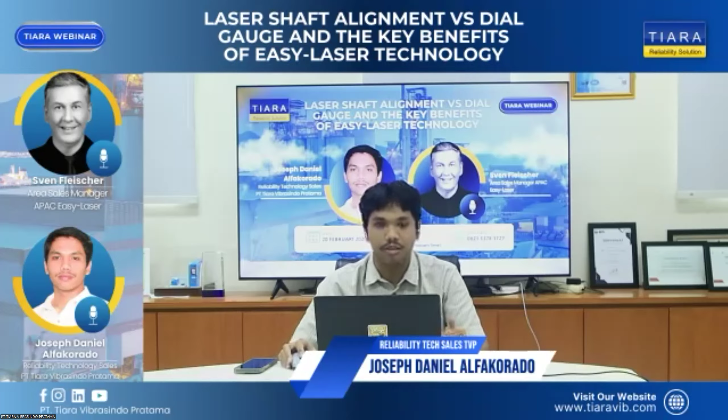Hello, good afternoon. Selamat siang. Halo Sven, selamat siang. Good afternoon.

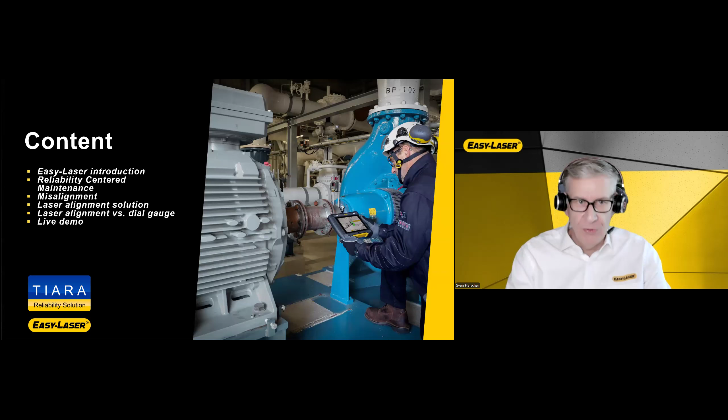Very quickly about the company, Easy Laser. In regards of facts, we were founded back in 1994, so a good 30 years ago. That's the time when electronics and digital capabilities were used to build laser alignment tools for industrial usage. Our company is based in a town called Mölndal, situated in a suburb of Gothenburg in Sweden, the second largest city of Sweden.

We have more than 100 employees at our headquarters. Those employees concentrate solely on designing, producing, and developing the laser alignment solutions, while our distributor network takes care of individual markets, territories, and countries. An appointed partner in cooperation with Easy Laser supports all of the operations and the end users in their territories.

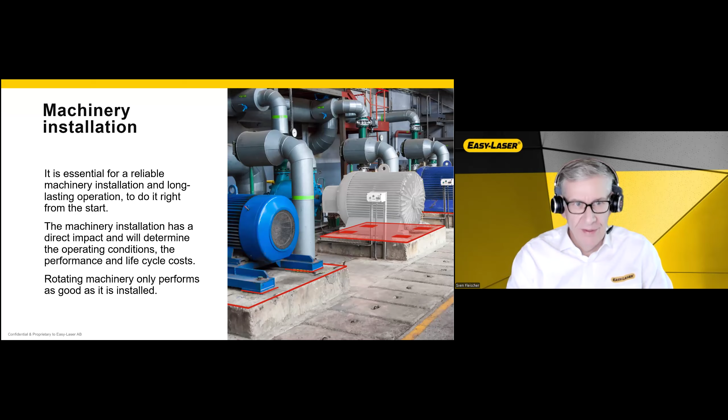So reliable, planned, and proactive maintenance and defect elimination typically leads to a much safer operation, more secure. It will be, as a consequence, more environmentally friendly. So I'll be talking here also about energy savings and things like this. Your operations will be, as a consequence, more productive, also therefore more competitive on the market and less stressing.

When we go back into asset management and maintenance philosophies, back in the 60s, the gentlemen Nolan and Heap figured out with statistics that most machines can be separated into certain patterns as they are operating in their lifetime. And against what the expectations of many people were at that time, and still today, those statistics have been proven correct even just a year ago. So that's not something very old that doesn't still happen.

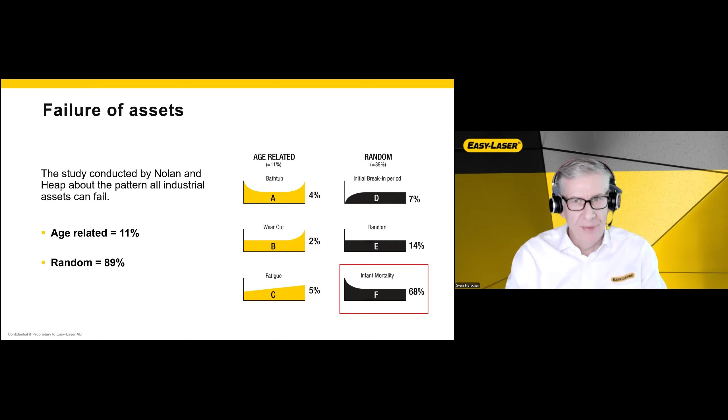That is something reliability-centered maintenance today is trying to overcome. And part of this material is to teach and make aware of our responsibilities. So when we have an idea and target of what we want to do, the application of the machines, the operation and so on, then we go to the designer, to the engineering, and to the installation teams to acquire machines for that job.

So there's a lot of communication and coordination possible. We are defining procedures of how these machines will be installed to benefit later from their operation in our processes. But most often we are lacking integrity - even though we know what needs to be done and how it's to be done, we often do not apply that. So we make mistakes, especially when dealing with different departments or even contractors.

So machines need to be transported after they are purchased. They need to be put on site. They need to be installed correctly with certain tolerances and specifications. And there, most of the failures actually happen.

This is what reliability-centered maintenance means. We like to avoid those problems. It's basically up to all of us to follow the procedures that have been defined, having knowledge about the effects of what we are actually doing in regards of those procedures. We need the right tools to comply with the requirements, to assess the condition of the machine, to make it comparable to those tolerances. So now in regards of laser alignment, why is this so important at the maintenance?

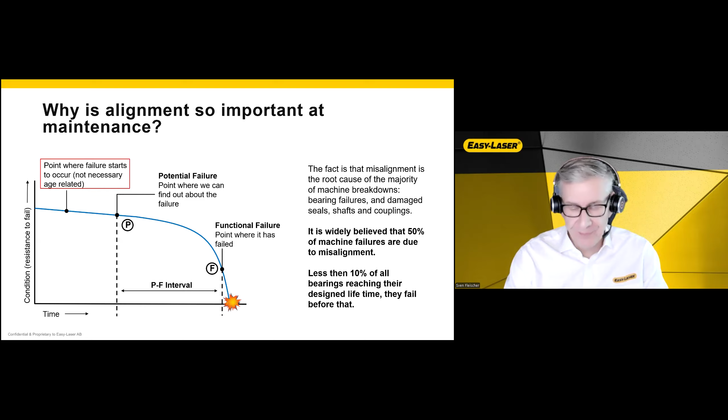Precision shaft alignment is key to achieving high reliability in rotating machines. If you just imagine that you would increase the load on a bearing by about 25%, then the lifetime of that bearing is already halved. Therefore, the lifetime is shortened, and you are coming permanently into the cycle of fixing and repairing the machine.

So my maintenance thinking is to make the machine healthy, so it will not come to that failure, or to reduce the possibility of that failure - and that means mostly bearings, couplings, and seals.

So an alignment of a machine, when we compare it to a tolerance like the ANSI standard at 3000 RPM, which is typically defined to have a permissible gap of 0.05 millimeter or less per coupling, per working diameter of 100 millimeter - if you achieve that, then you are simply increasing the lifetime of that bearing, of that machine, and having a cost saving as a consequence.

Now, when we talk about hundredths or even thousandths of a millimeter - because the coupling is typically smaller than 100 millimeter for the most common machines - we need to understand that you cannot really get close to that degree using a straight edge in the worst scenario, to measure the flanges on the coupling, or potentially also a dial indicator. Because a dial indicator may have a resolution up to hundredths, but typically achieves only 1/10 of a millimeter. And then you actually also do not really measure on the shaft, which is of interest for us in regards of alignment. So coupling alignment refers to the shafts because the bearings hold those shafts.

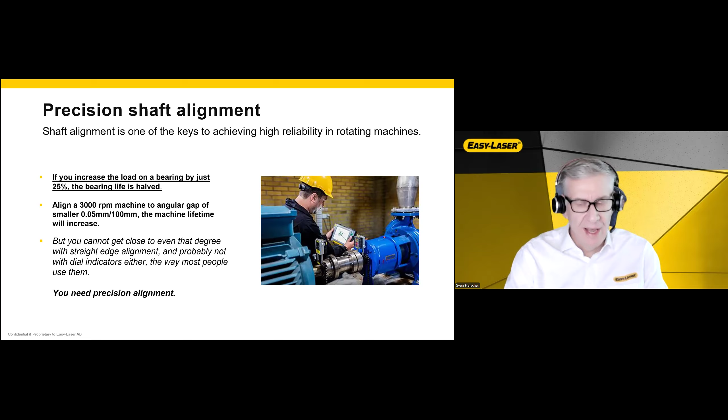What is actually misalignment? Where does it apply? We have not prepared this for very specific industries, since our audience is quite wide in different operations, but we talk in general about pumps, motors, gearboxes, compressors, fans, blowers, generators, or turbines. There are a lot of industrial machines transferring power - that is their core job. Transferring power means they are coupled with another machine, and therefore alignment for those kind of machines is really very important.

We concentrate a little bit more in this presentation on some examples for horizontal orientated machines. Besides that, you can do bore alignment, flatness, or parallel measurements on certain components in machine operations or vertically orientated machines. For today, because of the time, we give you an example in regards to horizontal orientated machines.

If you align those machines, typically you will increase the machine's uptime, reduce operating costs, and improve the processes - and depending what this process does, potentially the product quality. The environment, not only the machine itself but also the people around it, is typically safer. You have safer operations, less production losses, less bearing and sealing wear, and you are reducing, through elimination of root cause, the symptoms that typically show a problem - things like vibration level, high noise, temperature, and so on.

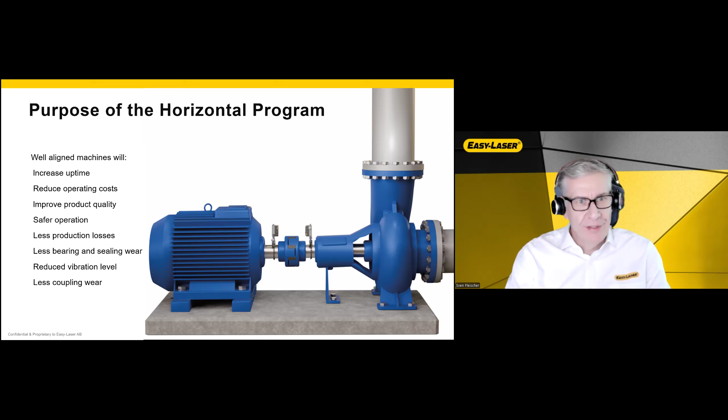The consequences of misalignment are basically the other way around. Machines that are misaligned have significant mechanical and operation problems, typically premature bearing, seal, and coupling failures. We're having increased vibration, noise, and temperature, which again is the symptom. But they are also consuming more energy, because if I'm having resistance in a misaligned component in my machine, I need more energy to overcome that, to rotate the shaft. Therefore the energy is higher, with excessive heat generation, which in cases can even be dangerous for the environment and the persons around the machine.

But the most important point in this whole story is the costly unplanned downtime. If a machine is failing because of bearing problems etc., you need to take it out of the process to fix, to repair, and bring it back into operation. This hurts the operations the most because you have loss of production, which costs a lot of money.

So to think about healthy operations and benefits of ROI - investment in precision alignment tools is typically paid back very quickly because they improve your operations and reduce the possibility and likelihood of a machine failure. Therefore you increase your machine uptime. Proper alignment minimizes those risks and extends the lifetime of your rotating machines.

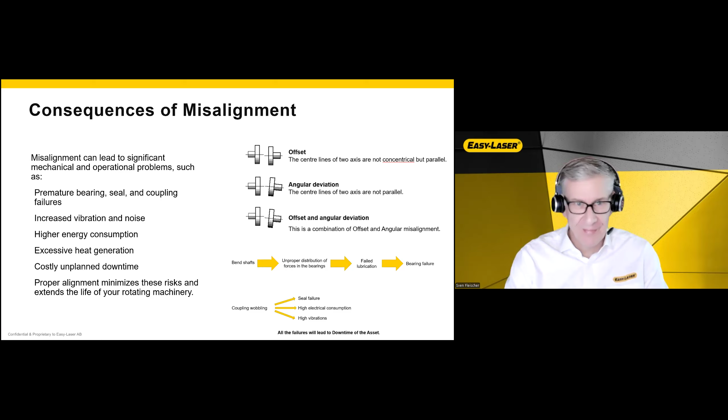Then there we had the dial gauges or dial indicator, and we have a bit of a topic on this towards the end of the presentation. Traditional methods require time and extensive knowledge to align the machine correctly and meet the required tolerances. When I see customers in the industry, in a large audience, and I ask who is doing the dial gauge, it's typically the senior engineers.

Those with experience have mastered alignment over a long time. Not everyone can necessarily align machines with dial gauges because it's complicated. You need to learn that, and it requires a certain amount of experience to master.

But even the best dial gauge alignment tools and engineers do not achieve the level that laser alignment today can reach. Laser shaft alignment is today's quickest, most accurate form of aligning machines using modern technology for precision shaft alignment. In addition to coupled shaft alignment comparisons, it can also be used for measuring more complex alignments.

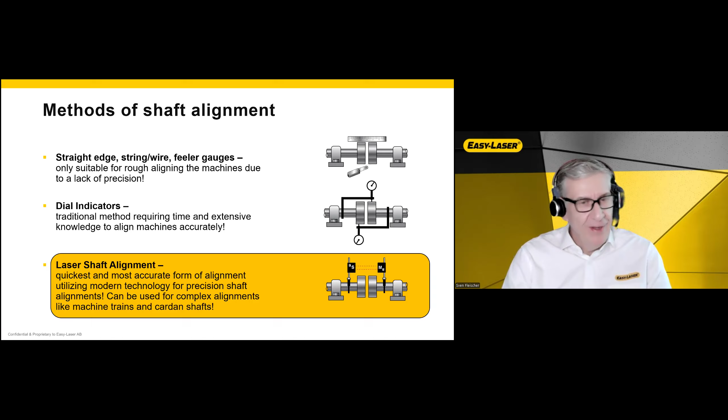To give you an idea what laser alignment actually is, many of you surely know how a system looks like, but maybe some others do not. We have here an example of what, in a carry case, an ordinary shaft alignment system looks like.

The heart of the instrument, or of the package, is typically the measurement units. There are two, an S and an M unit. They are mounted, as part of the package, with certain brackets, chains, magnet adapters, etc., around the rotating shaft from coupled machines.

There are additional accessories inside of this case, and the way you communicate and navigate through the alignment process is via a display unit. The display unit is a tablet, industrial grade, with multiple options and specifications.

We at Easy Laser do that app-based, so it's an Android operating tablet or industrial tablet, but you're not mandatory to use that. Andy will show you later that it's very easily possible to use a smartphone or any kind of tablet, as long as it's either iOS or Android-based, because you can just download the app yourself from the App Store.

As I said, there's no registration, no licensing, no money involved, and then you're ready to go ahead. You just need to have the measurement heads or a system for a certain purpose of aligning machines.

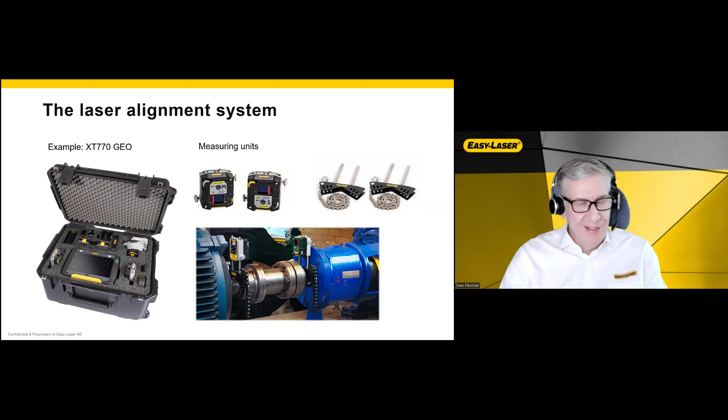But depending on your environment, and also how much you want to spend, you can run it on a tablet or a smartphone, which can also be industrial grade. So you have the complete option to choose between those hardware platforms—just download the app on that instrument and communicate via Bluetooth with the wireless measurement units.

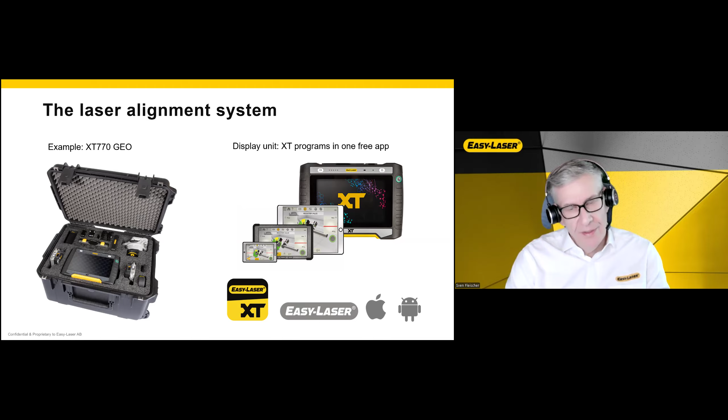So this is about shaft alignment and potentially geometrics, but the app itself serves even more. There are components available that help you align sheaves, for belt alignment. They communicate with the same app in the same way, via Bluetooth, completely free in the application. We also have a small vibration measurement tool that is purpose-designed and supplied into the industry.

I would call it a nurse. So it's not the specific doctor level with a super vibration data analyzer. It is something an engineer and technician that may not have deep training in condition monitoring and vibration can use. It's a checker.

You check and get very simplified information on that instrument about the rotating machine's vibration noise level, applying to the bearing and velocity, where typically unbalance, misalignment, looseness, and resonances apply, giving you an indication that this machine has a problem. It also gives you an FFT to pinpoint the direction a little, and that's why I'm calling it a nurse—it's very easy to handle.

You can use it over hundreds and thousands of machines, and for those machines where it's a bit tricky to figure out the root cause, you engage an expert, potentially a contractor, somebody that has another tool and the knowledge to do deeper troubleshooting analysis.

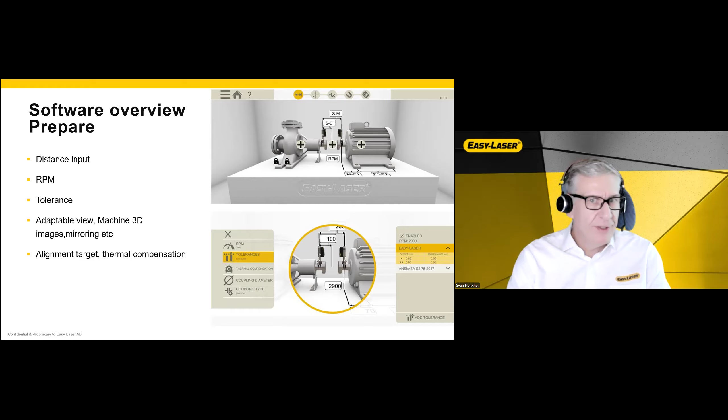When I say measure, I recommend doing the soft foot alignment or measurement before starting coupled or laser machine alignment. You have the measurement units on the machine anyway. And while many people prefer to measure soft foot with a dial or a feeler gauge on the foot, we like to measure where it matters, because the soft foot affects the operation of the machine.

That means the rotational energy of the shaft—we're interested in making the machine healthy, and that refers to the rotating shaft in its support, in its bearing. That's why we measure with the measurement heads on the shaft. So when we get to this soft foot menu, it goes a little further in the program, and you're requested to loosen the tightening bolts.

So when there is a soft foot existing, it shows you a relaxation. The machine is really moving because you tension and bend potentially the machine feet, and this is measured on the shaft. So if there's a soft foot or a movement greater than 0.05 millimeter on any of those feet, this is typically recommended to be corrected, because that stress towards the machine and its bearing is too high.

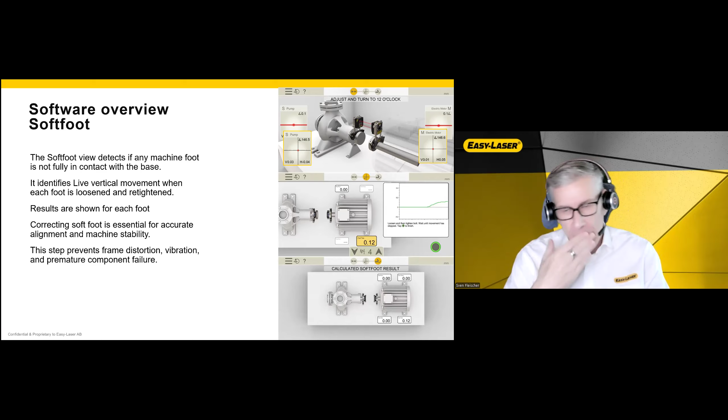After the soft foot is corrected, you can go into the measurement mode for the laser shaft alignment. Depending on the instrument chosen to be your shaft alignment system, you have various options to take data. The installation of the measurement units with those brackets does not differ.

You have the classic 9-12-3 measurement method, which refers to the dial gauge positioning, to ease those people that have done dial gauge alignment into doing the same with laser alignment. We recommend doing that with EasyTurn, because it also has 3 measurement points, but they are more flexible. You do not necessarily have to measure them at a 90-degree angle to each other.

The smallest permissible angle in positioning of the shaft between those 3 points, or each point, can be 20, so in summary 40. That means the smallest rotation angle at which we can measure and identify the alignment condition is 40 degrees. Mathematically it's better if the angle is greater, but typically you can rotate a minimum of about 90 degrees in summary.

With multi-point, you can take more data. It's dependent on the application, the machine, line of sight, and things like that. So that's basically your choice - you have multiple options that suit multiple kinds of applications and machines.

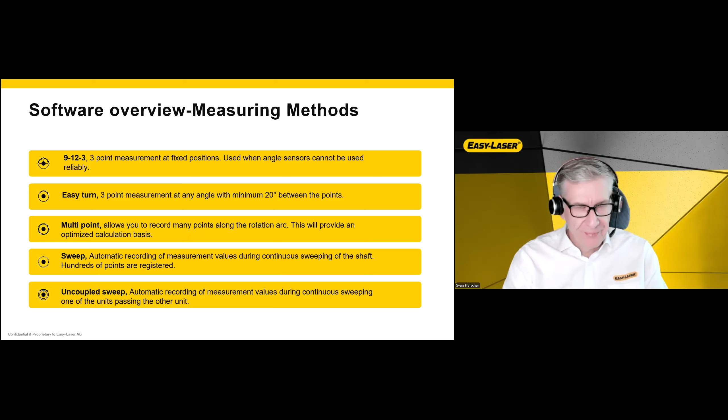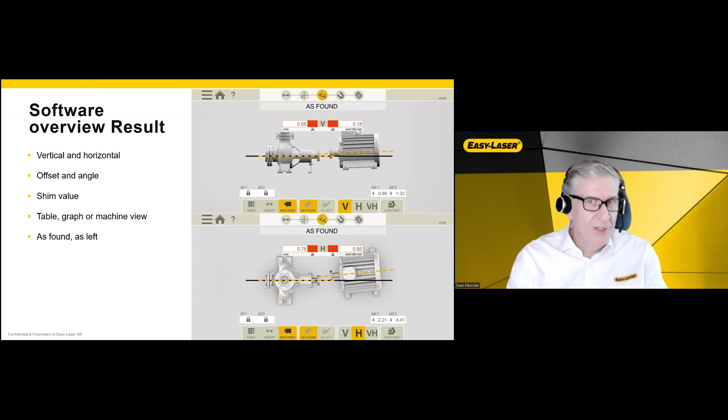In the next step, you would go further and do the live adjustment. While the measurement units are still on the machine, you can measure completely live and correct the position of the machine. There are different measurement or correction modes available. We have a small demonstration of this as well from my colleague Andy.

You bring the machine into range, inside the tolerance shown at the bottom of the picture, so those colors and values fit within the range of tolerance into the green and yellow range. Then you're good - your machine is basically tightened again and complies with the requirements. You're typically doing one more measurement turn to have a record of as-found and as-left, as evidence that you have corrected the machine and brought it into a condition that complies with the specification.

And then you are proceeding to the reporting. The software included with the app allows you to have the reporting immediately available through our templates, with all of the data from whatever you have done in the shaft alignment - as found, as left, soft foot, dimensions - all of those things are protocols, which is basically the chain of evidence we provide through the process.

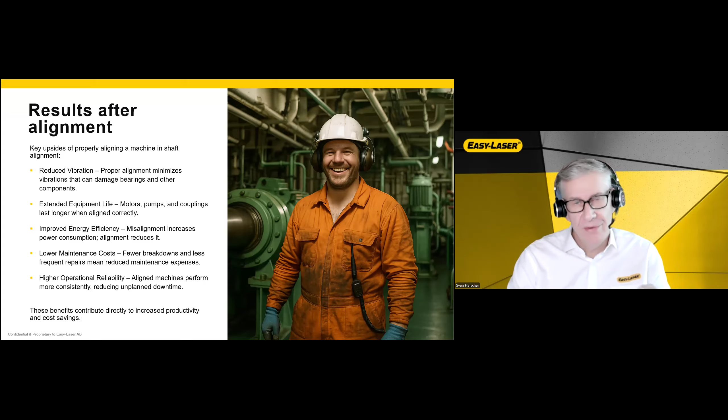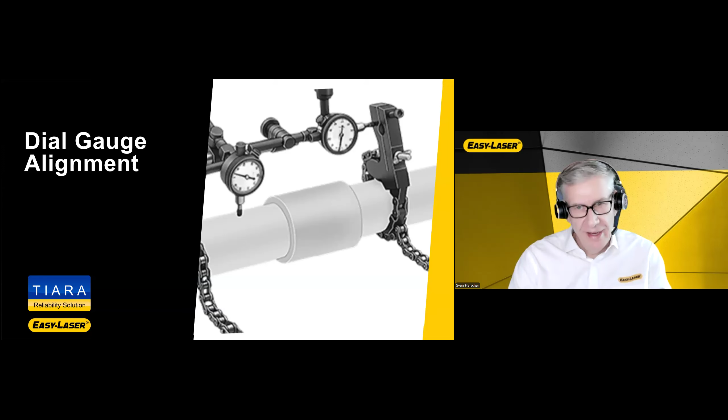Next, I have a couple of slides regarding dial gauge alignment. I don't want to spend too much time on them because it's quite complicated, especially showing the true picture. But if you look at these kinds of graphics, you'll realize how complicated it can be. Dial gauge alignment has many different ways of assembling those dials with certain brackets on the machine across the coupling.

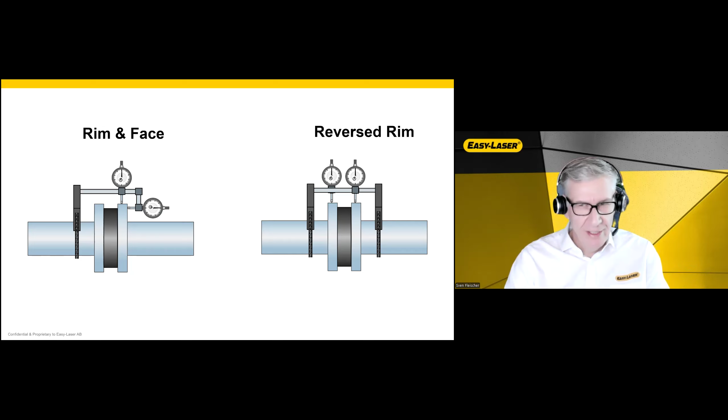The most famous methods used in the past are the so-called rim and face, and reverse rim methods. There are ways to measure with dial gauges pointing the plunger on the surface of the coupling, even though they're mounted with the bracket on the shaft - what you're really measuring is the surface of the coupling, and this may not be the rotational center line. With laser, we actually measure, with the laser bracket mounted on the shaft, the real center of the rotating shaft, which does not have to be true for the coupling. So that's already a point where dial gauge alignment differs a bit because of this technicality, which does not allow you to achieve the desired tolerances or accuracy.

When we're looking into the variety of brackets, brands, and dials that exist, there are hundreds and thousands, all kinds of designs. It's quite hard to learn how they should be assembled, in which way, and in what kind of assembly towards each other. It's not easy to put those dials correctly on, pre-tensioned with the bracket bar and things like that.

If you look at the animation on the drawings here, considering rim readings and face readings, these are typically measured at 4 positions, 180 degrees against each other, so 12 to 6 and 3 to 9 o'clock.

We are accessing, basically - excuse me, maybe I should drink something, just give me a second.

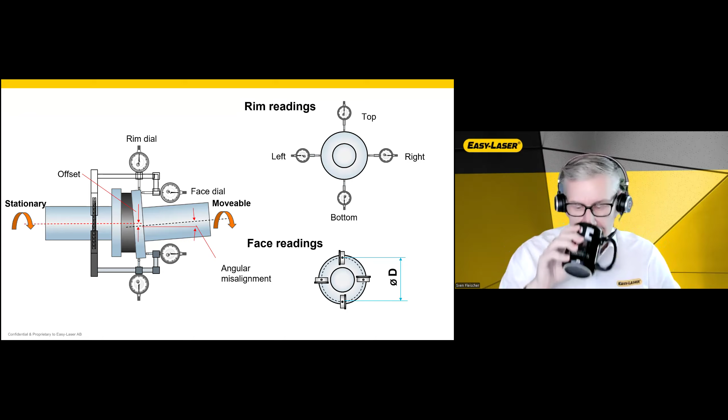We're accessing the displacement when we rotate the shaft, which affects the plunger of the dial, showing how much stress is inside the machine. We measure on the coupling, and from that we figure out a parallel misalignment and an angular misalignment.

You really need to be trained on that and learn how to do it correctly, and it comes with experience, long-lasting experience. Engineers today - there aren't that many who can actually correctly measure with dial gauges. I have done that, I can do that, but I will never be as good or as fast as I am with laser alignment, which is by far easier to handle.

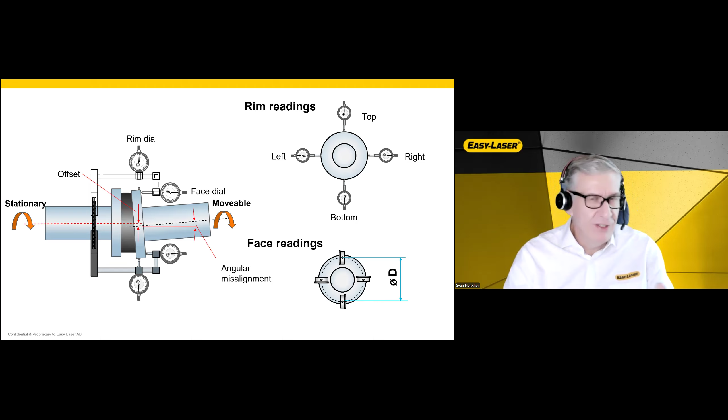So rim and face have different mounting alternatives - there are really many options, depending on the situation of the shaft, with coupling, uncoupled, etc. By right, you would need to learn and know all of them, and depending on the arrangement of the dials, the kind of readings need to be really understood to then do your calculation of the alignment by hand, because the dials do not tell you about the alignment of the machine itself.

You have to take those readings in the correct way and do the calculations by hand. You basically have a measurement program in Excel that allows you to convert the data and does the calculation, but it is not done by the dial gauge itself. Here a lot of mistakes happen, misunderstandings depending on the arrangement - it's really a tricky thing.

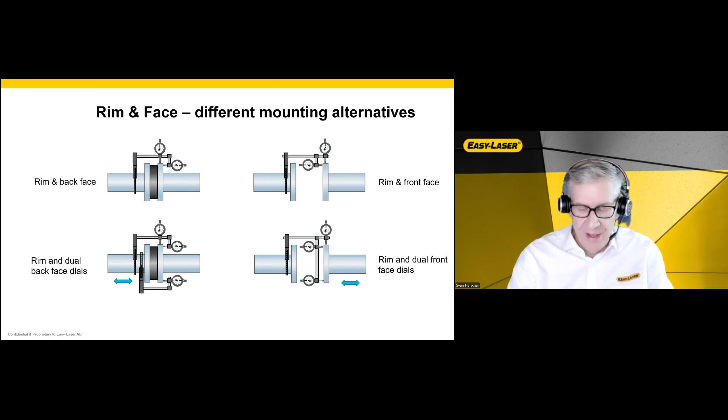Another thing is the so-called validation rule - the classic top plus bottom versus left and right, where those two pairs, 180 degrees shifted from each other, need to be compared. Mistakes also happen here, where the data gets mixed up and then wrongly calculated. That's really something to be aware of.

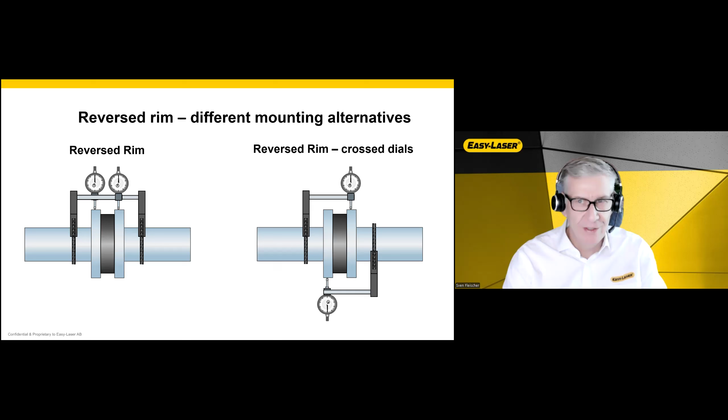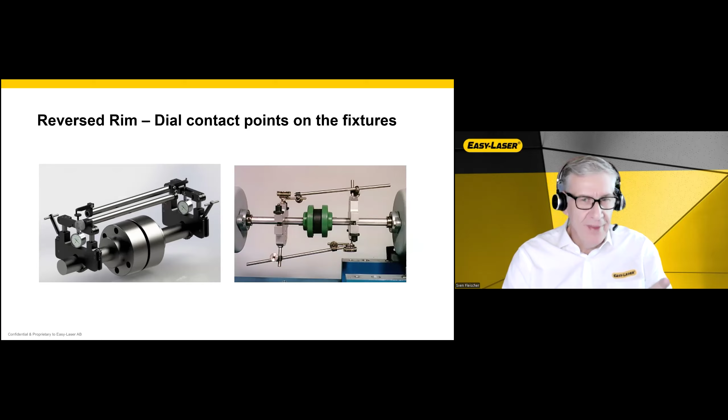Just one more example here about those fixtures in the reversed rim - the contact points of those fixtures need to be really understood, so that the brackets that are mounted, depending on the equipment used, are assembled in the correct way. The challenge, summarized a bit, is that dial gauge indicators have mechanical limitations inside the bracket and the dial itself.

Then they are very, very dependent on the operator. We have made tests with customers, also on our own - same machine, same dial, same bracket. If you take two engineers to repeat the measurements, you typically get two different results, because everybody installs them in a slightly different way. There you have a lot of variation in interpreting the data.

Then calculation is important, and you're still not yet at the adjustment. All of these findings and calculations need to be applied to the machine in regards to adjusting it. One major disadvantage of this whole system is the documentation - today you are required to prove and document these kinds of corrections to the machine, and this is hard to do with a dial gauge. You're relying on a hand protocol that you maybe write yourself in Word or Excel.

But it is not really representing the measurement tools itself. The engineer is doing that, while the electronics, the digitizing from a laser alignment system allows you to have this report immediately, and it is basically therefore user independent. So it's really a digital way to secure the complete process of the machine correction and alignment.

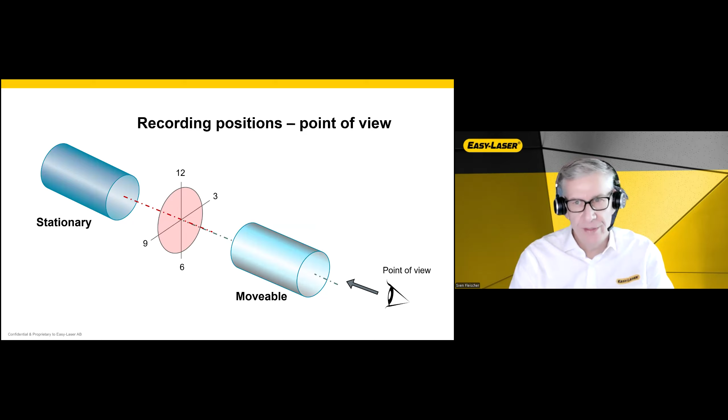The flow of the energy from the stationary machine towards the movable machine, or the other way around, defines how you look at the machine. We see this little indication on the bottom right-hand side, the point of view, because this defines where is 9 and 3 o'clock. Everybody knows where 12 o'clock and 6 o'clock are, but 9 and 3 is often mixed up because mechanics versus electricians look at the machine the different way. This is a classic mistake, that 9 and 3 gets mixed up, so consequently those rim readings in regards of positioning will be reversed.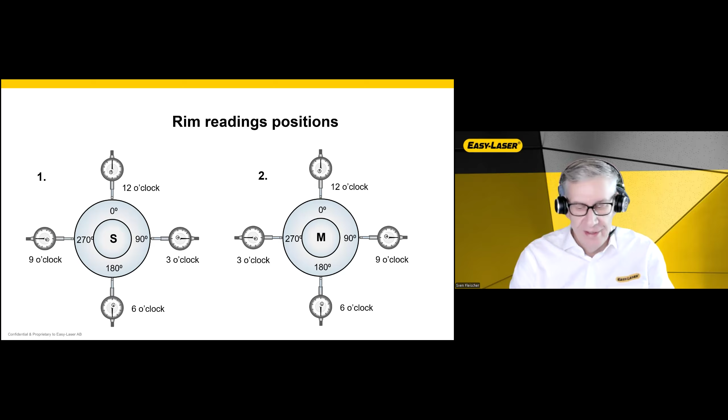So plus becomes minus, minus becomes plus, and that is very important to understand and to learn. The same applies for the face reading, that the 9 and 3 o'clock depend on the orientation of the machine, and need to be done correctly, or you need to know the correct way to do that.

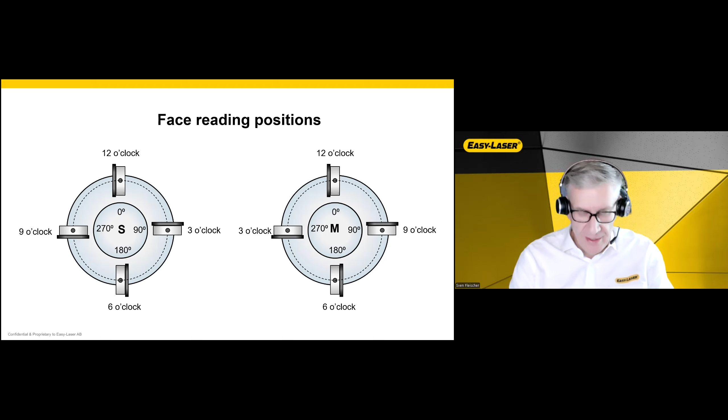Another example I had a couple of times, most often with users in Japan and South Korea, where this kind of dial gauge alignment usage is still common, and they always challenge laser alignment. They say, I'm the master in dial gauge alignment, and I do not trust so much the better technology. Often we find differences. By testing a machine once with the dial gauge and second with the laser alignment system, we're not only getting better accuracy results, the results will also be different. It was revealing with one customer in Japan who had doubt that the laser alignment measurement was not correct. We proved him wrong, because this person did not understand the influence of bar sag.

This is the pre-tightening of the dials against gravitation. Measuring between the position from 12 o'clock versus 6 o'clock had a major, huge impact on this person's measurement. Even though he had measured with dial gauges for many years, he had not correctly compensated for the bar sag. This applies to the knowledge of how to install the dials correctly, and how to determine the compensation for bar sag, how to do that. There is really a long guideline and training material for this.

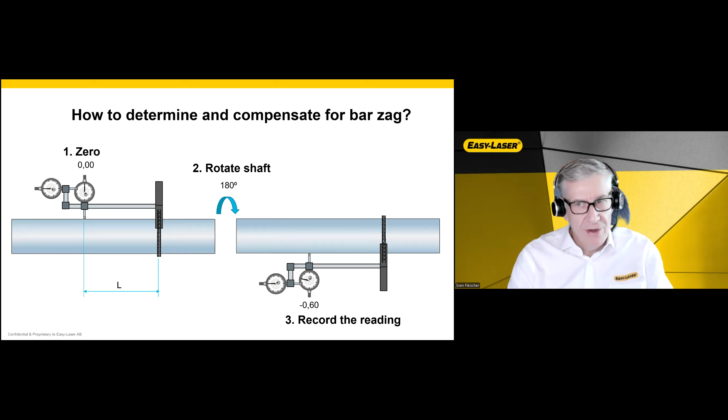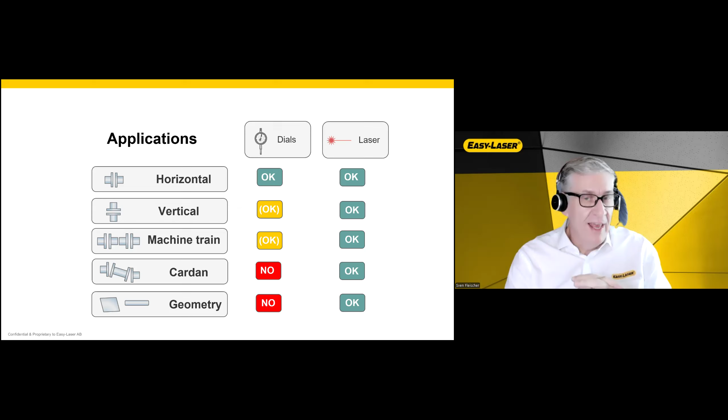Bottom line from all of this: dial gauge alignment is complicated, and we're talking here about standard shaft, standard coupling only. It needs to be learned, it needs many years of experience to master. And even if you have mastered that, you can achieve horizontal dial gauge alignment on a coupled shaft, but maybe not in the range where the specification or tolerance requires, not good enough. If you come across a vertical machine, it becomes even more challenging. A machine train already, multiple coupled machines, is really, really difficult to manage, calculate, and get right.

For cardan shaft couplings or machines, and for geometric aspects like line bore, flatness, and things like that, there's no way to do that properly with a dial gauge. This is all very easily taken care of by a laser alignment system. So these are the benefits of laser alignment versus dial gauge: it is way faster, much easier to handle, and way more accurate.

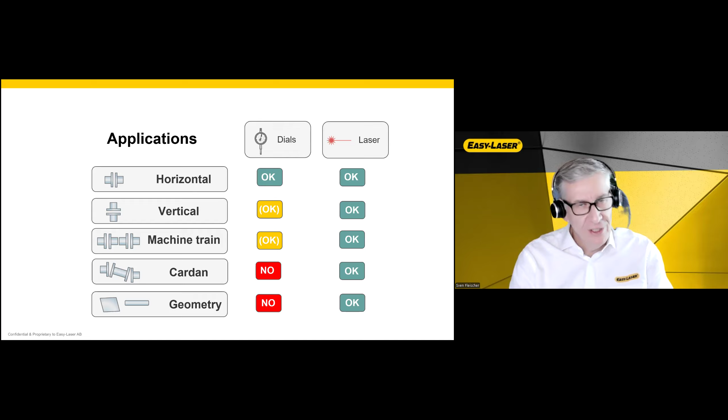It does not depend on the end user. That's the electronic core. It serves the technician as a tool to assess the condition of the machine, and it is completely digital. This 1 micron accuracy in assessing the condition and correcting the machine leads to a digital protocol that serves you, the technician and engineer, as evidence that you have corrected the machine and left it in the desired quality, in the desired specification to meet the requirements.

In summary, for dial gauges, the advantages are that they are of course lower in price, there's no doubt lower than a laser alignment system, but they are also very basic and rugged in their way, so they have limited possibilities in regards of measurement application and machines. In the best scenario they can maybe have specification up to hundredths of a millimeter accuracy, but in practice you very likely will not achieve that.

So you are achieving potentially tenth of millimeter accuracy. The disadvantage of the dial gauge is it is very dependent on the operator. As said, two different persons likely coming to a different result.

It is just how this works with the brackets. That requires a very long learning curve to master. So training and expertise or experience is required here. It still comes with many risks to make mistakes. It lasts a lot longer to measure, calculate, and then correct the machine. And it has limitations in regards to where to apply it.

And for me, the greatest disadvantage is the way of documentation, because I do not have a really digital proof. Even though you have potentially made a report, the report is made by a person, and then it comes to kind of trust and integrity. Today, compliance is typically referred to as having this kind of validation of quality work done by the instrument itself, and that is done throughout the laser alignment system itself.

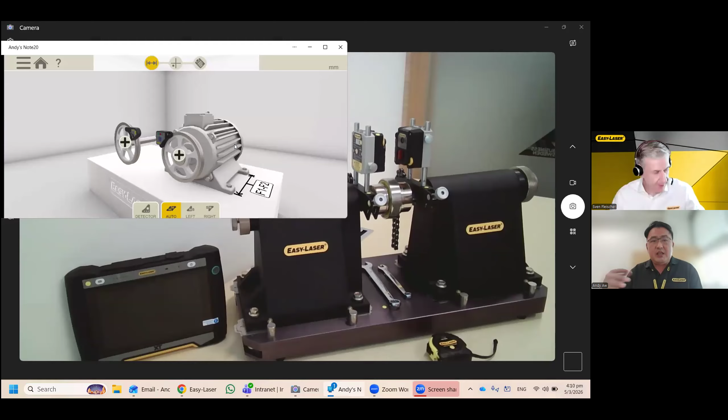So before I start, I want to tell you how easy it is to download our app. For Android users, you need to go to Play Store, search Easy Laser, and install our app. It's free, it won't take up a lot of your memory, you don't need to pay any coins, it's absolutely free, and you don't need a login or anything.

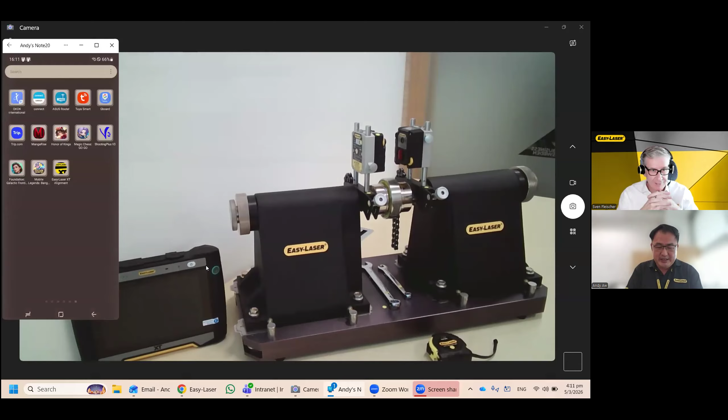So once you install, you can click on the app, then it will go to the main menu. From here, you can also try to find out by yourself when you have time what kind of functions Easy Laser can do: straightness, easy trend, twist, belt, and vibration. Of course, you do have to give access to the camera if you want to take some photos.

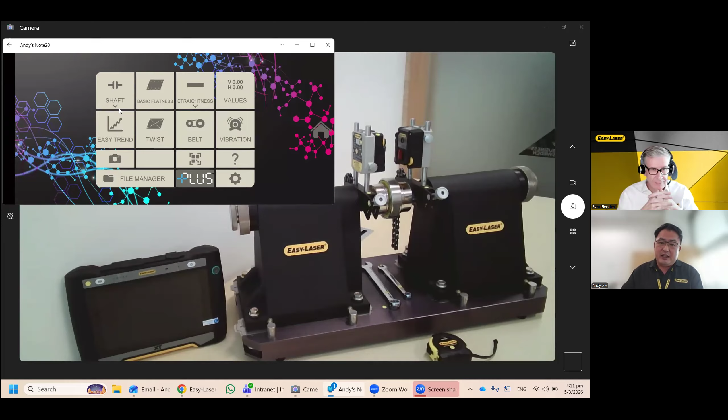All right, so let me start with a demonstration on this shaft alignment rig. Okay, so this is our, one moment, okay, so this is our XT770 with our XT12 display unit. So what I need to do now, everything has been set up with XT70S and XT70M. Okay, so let me turn on.

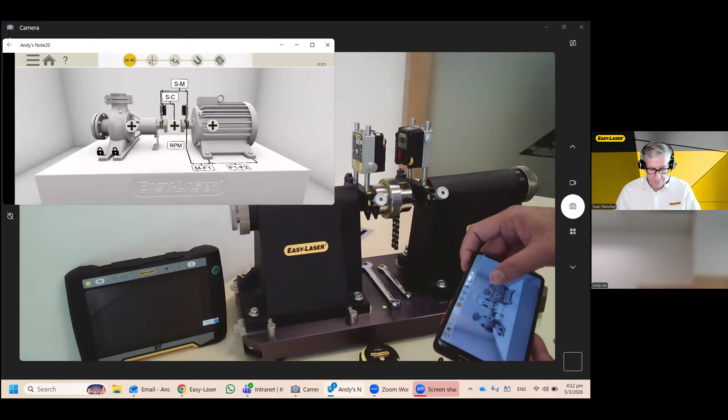So from the app, let's say if this is the shaft horizontal, so I start with a new one. Okay, so it comes out with this 3D picture showing a pump and a motor. So if you have time, you can also go in and change the configuration to other things like a compressor. But today I'll be using pump and motor.

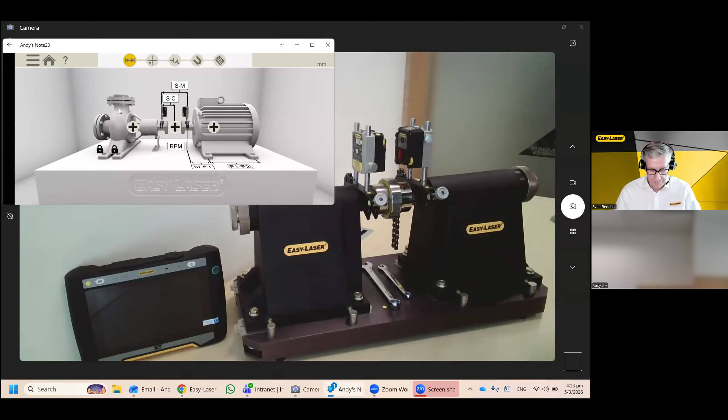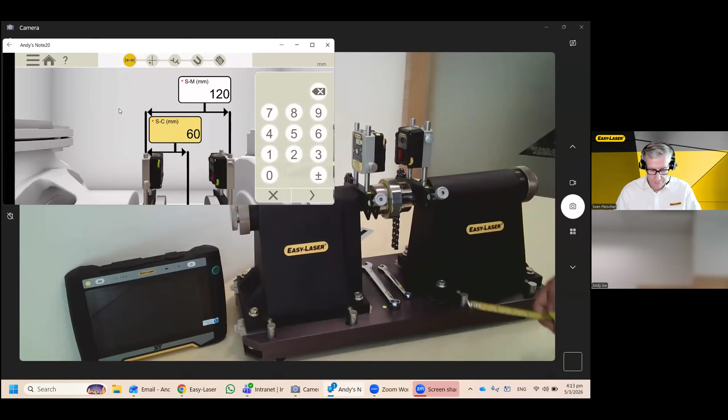So same thing, S and M, the distance, you need to input the distance, tell the system what are the dimensions before they can calculate and give you a result. So for S and M, 120. Okay, so S to center, by default, it should be half, which it is. You have to key in the RPM. Okay, for D.

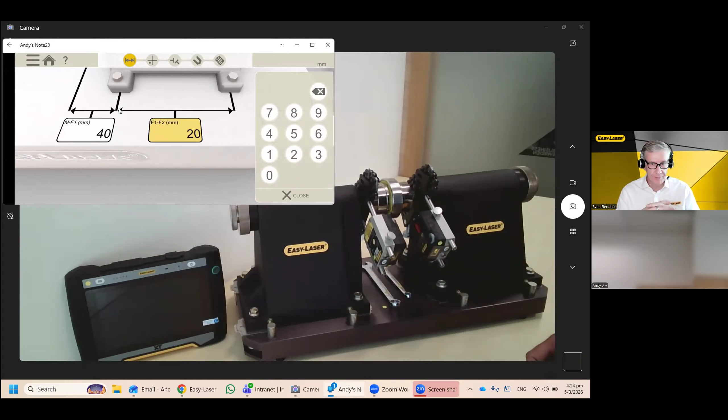Okay, so once you key in all the dimensions, then you can choose over here what is the RPM, the tolerances that you want. So this time around, I'm choosing tolerance from ANSI standard, coupling diameter, or coupling type. All this you can choose whether it's a short flex or a spacer shaft. So by default it's 100, but let's say if I were to do a measurement, ours is at 90.

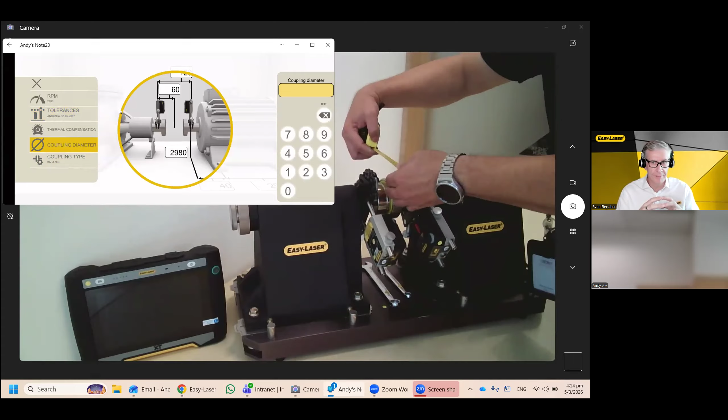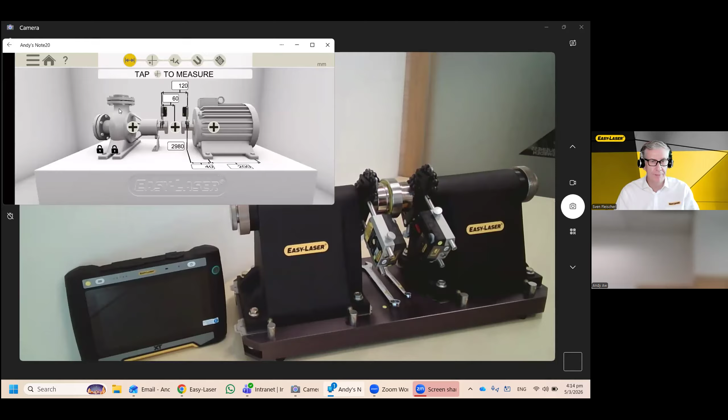Okay, input all in. Same goes here, you can change the configuration as well. Okay, so on the tab there are 5: one, two, three, four, five. So the first one is to enter the dimensions, then they will tell you tab plus to measure. So from here, you can start to measure if, let's say, what you need.

Okay, so because it's connected, usually they will give you options to choose if it's not connected. What is the serial number? How are you going to connect? So I can disconnect, then also connect them again.

From your side, if I understand that you don't have a device over here, you have an option to use the demo unit from our app, so you can do it yourself also. But for this demonstration, I will need to connect to the real devices and do a demo.

All right, so both lasers are centered together. What I need to do is two measurements: one is easy turn, one is sweep. As explained just now, the smallest by default is 40 degrees. So let's start with easy turn.

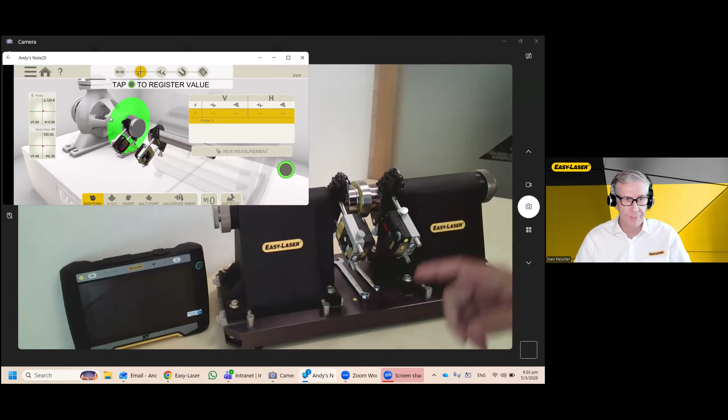Andy, hold on a moment please. Okay, yep. I just noticed something, and it's maybe worth mentioning to the audience.

So the two left-hand side polar diagrams where you see the laser dot in the center, that is basically the two measurement units, a dot laser 2-axis PSD. You see the vertical and horizontal axis, and the laser beam is in the center, but you also see the degrees.

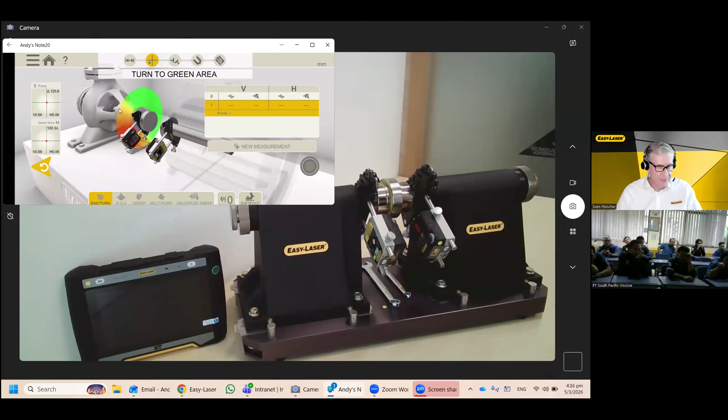So when I'm thinking about the hassle with 9 and 3 o'clock with dial gauge and communication -- can you close that please, Andy? Okay, just close, yeah.

On the left-hand side, you see 120 degrees from both units, so this instrument takes care of that automatically. You don't have to worry about doing something wrong with the 9, 3 o'clock, because the measurement units measure their own angle in position when you're rotating the shaft.

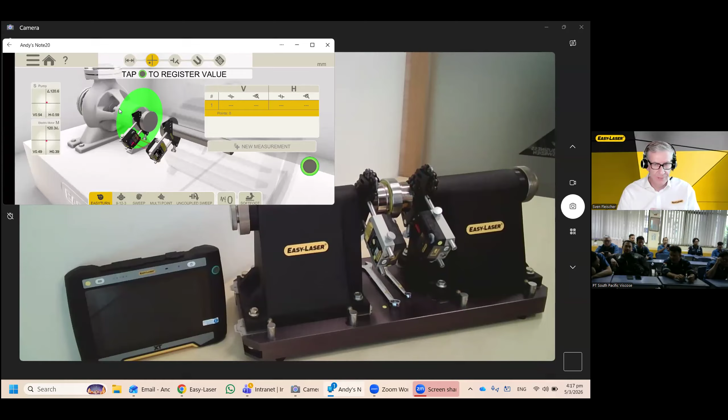So Andy, when you're now rotating please to 12 o'clock, it is supposed to be 0. Could you do that please? Yep, turn to 12 o'clock.

They are permanently live transmitting now with the app, and you have all of the data that you need. So it's by far easier without all of the hassle that you would typically need to take care of when doing that with a dial gauge. Okay, 12 o'clock now. Thank you.

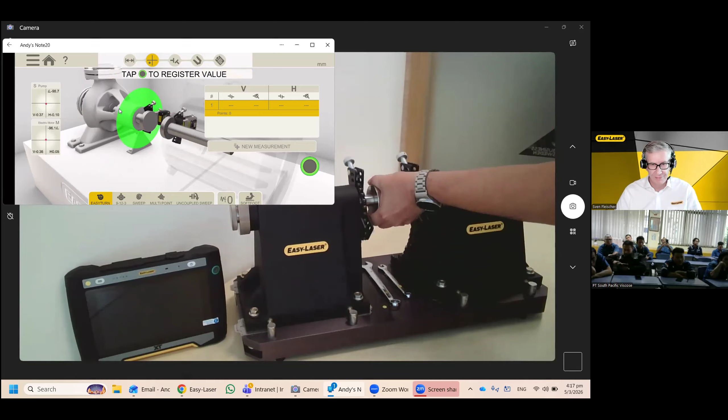So let me carry on with easy turn. Usually we have to turn the direction of the motor, so we can start at this angle, to get data.

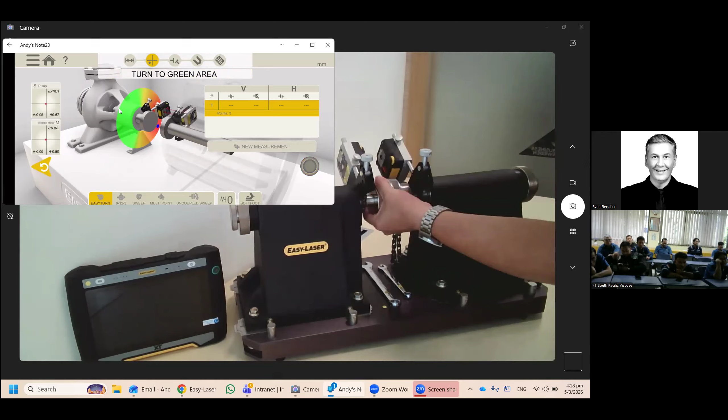By recommendation, you have to register at the green, but no problem, you can get the data here as well. Okay, register value, so these values are the results.

So I'll do another one, which is a sweep. For sweep, once you click on the green button, it will automatically get data. Let me show you -- it will automatically collect data until you press the stop button. So when you turn, it's taking a lot of points.

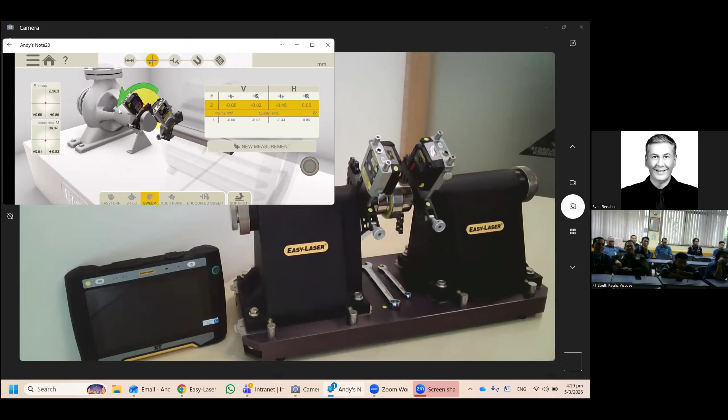Okay, so another set of results. So you need to click on the next one.

So as found, what is the misalignment that you have? For vertical, over here that means the machine on the left, the pump, is lower than the motor, so you need to add shims. But for the benefit of demonstration, I will do the adjustment on the horizontal part, where you shift the machine or the motor towards me or away from me. So this is as found.

If you click on the next tab, it shows you how to adjust, so for Live 360 -- Andy, hold on a moment please. Okay, sorry to interrupt you.

I'm just reading a little bit through a couple of the messages in the chat. Please do me a favor and go back to the settings from the very beginning, and click on the coupling plus.

Coupling. So one question is, how could we handle potentially dynamic stress, which is thermal growth, pipe strain, and things like that? The XT770 with its components has a feature inbuilt that's called easy trend. It would use the same measurement units, but not mounted on the shaft, mounted on the body of the machine, and then you are measuring in a recording mode, potentially over hours, if any compensation would be required.

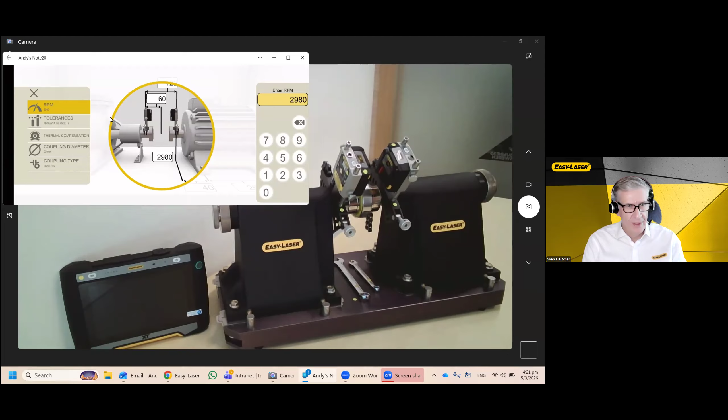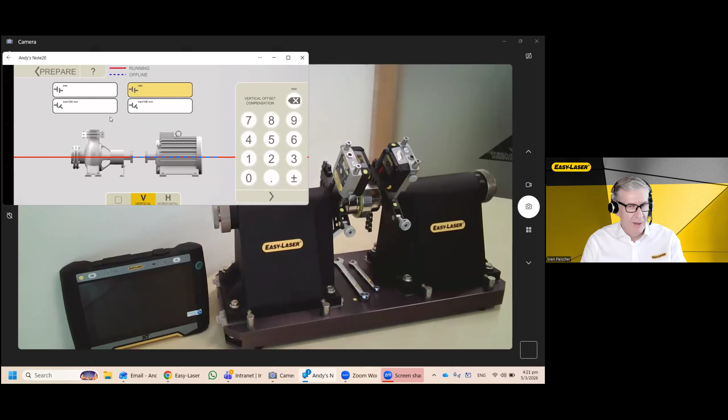And you can use that value inside of the setting called thermal compensation. Could you click on that, please? So this kind of growth needs to be compensated for, so that the alignment tool or the shaft alignment can do that -- you just need to key in how much that growth would be, once in parallel and second in angular, for vertical and horizontal direction.

And then you would align the machine, including that compensation factor. That means it would be perfectly aligned in its operating condition, not in the condition when you are doing the alignment, which is typically called not thermally expanded.

The smallest angle we'd be able to measure with the rotation Andy has shown is 40 degrees. With the dial gauge, you typically require 180 degrees, or in the best scenario 360 degrees. That's where laser alignment comes into play, with live measurement readings or easy turn using just 3 points in a rotating angle of only 40 degrees. That's the smallest possible angle the system can use, and it's good enough for smaller rotating angles - 40 or 20 degrees between the 3 dots is the smallest angle the system can measure.

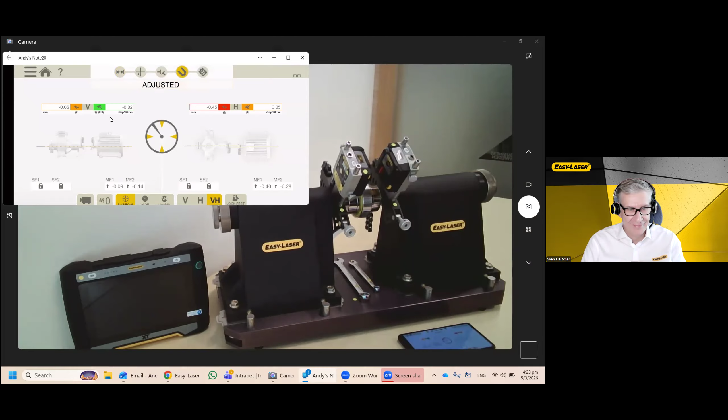So over here, I just started doing adjustment, live 360. Now what I need to do is bring the motor towards me - minus and plus.

Sorry to interrupt again, just to explain what live 360 is. The XT770 system measures simultaneously the movement of the machine in every dimension, with the capability to measure vertically and horizontally at the same time and in the same position of the measurement units. This means you do not need to rotate them during the process to any other position - you keep the rotating shaft with the measurement units in place, and it measures all dimensions, vertical and horizontal, live all the time.

Thank you, Andy. Okay, just a quick one - I'll show them adjusting.

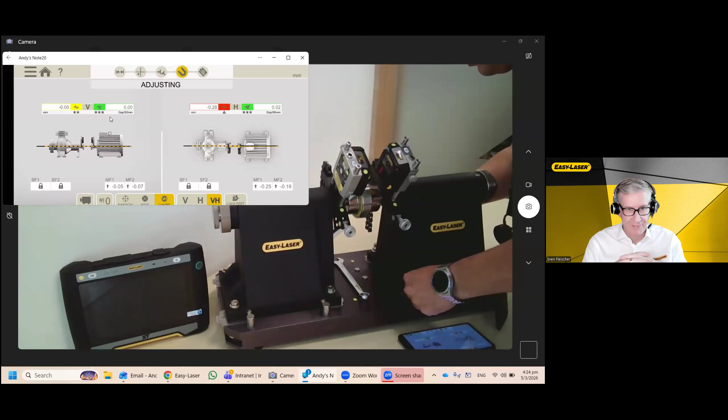Andy is already in that live mode, and you see when he is adjusting those little screws, like the jack on the side, he is pushing the machine horizontally - pushing and away from me.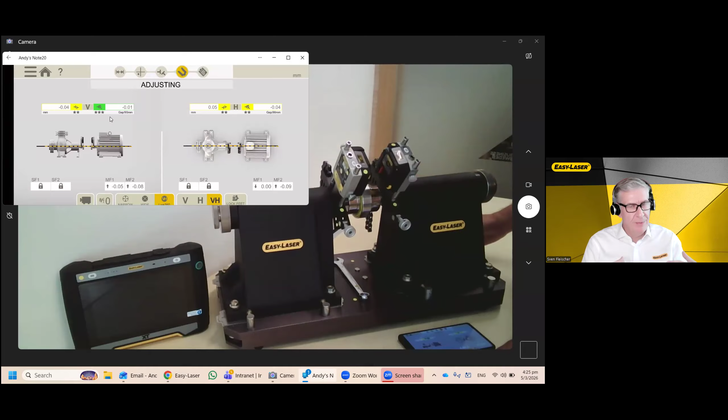It's indicated on the bottom - you see those little arrows next to MF1 and MF2. Depending on the position of Andy, you would be told that the machine on the drive side needs to come towards you or further away from you. Same for the non-drive side. So you have a clear indication of which direction to correct the machine.

Okay, so once the horizontal part is adjusted, you click the next one. This is where you can print the results, the reports as found and as left.

From here you have choices like the layouts - what kind of layouts do you want? You can choose, you can save this as a template, maybe for another shaft alignment in 6 months' time, or you can finalize the results so you can create a PDF from here.

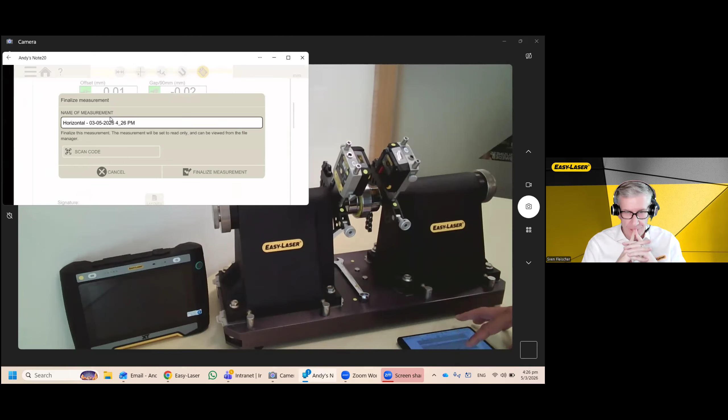So finalize the measurement, and from here you can create a PDF. It will be in your file manager later. From here you can also share this report via email - it says share - and also choose layouts in Excel format.

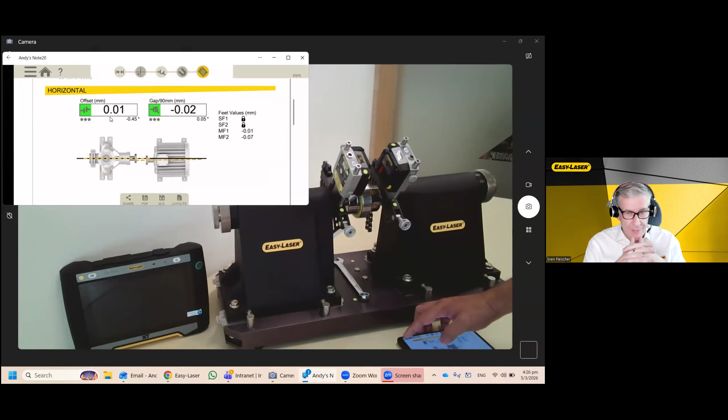I can show you - file manager, this is the last reading that I have done.

So next, the belt alignment. One moment.

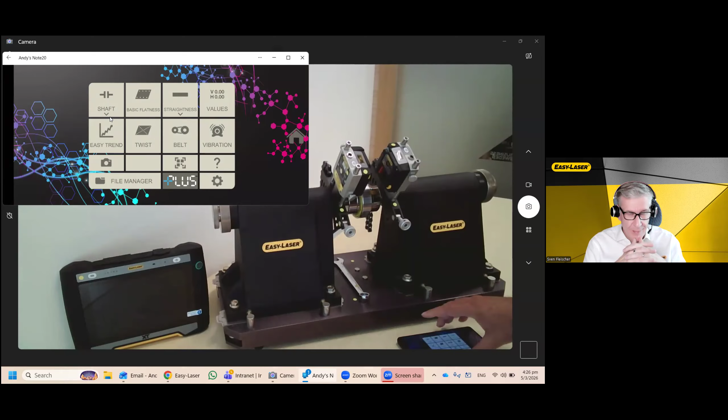This is just an add-on tool we have, and we are the only one worldwide with the capability of an instrument that really measures digitally the alignment position of sheaves. We have an emitter and a receiver - the receiver is connected to the app, and it's the element that measures with high accuracy the positioning of the sheaves to each other. They will now quickly demonstrate that.

Okay, this is our BTA, belt transmission alignment. For this round, you have to click on the belt button - this is for belt alignment.

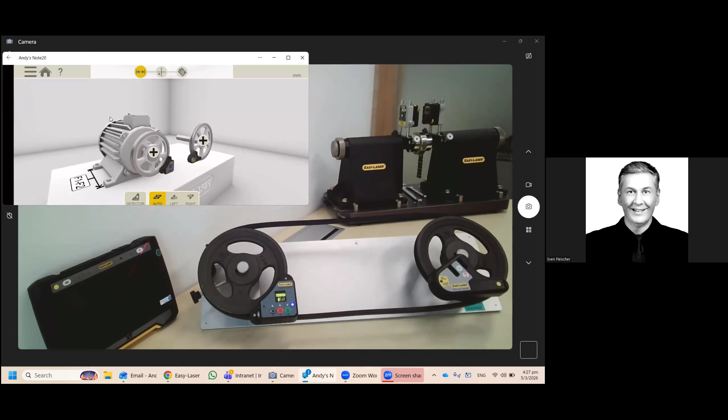Once you connect the detector, this is available - it's connected, and it automatically adjusts to the correct side, or you can choose left or right. This time it's auto, so you need to input.

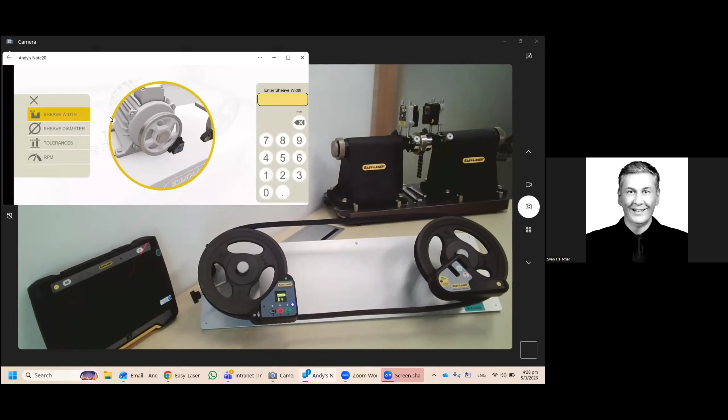Here it's about 150. Click on the plus. Sheave width is about 20. Diameter is about 190.

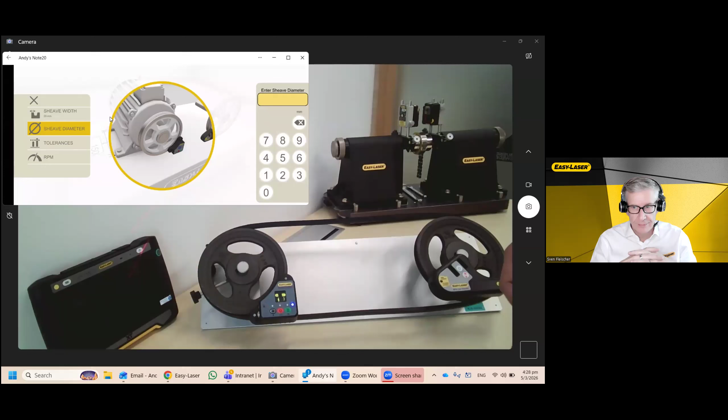Then over here there are three tabs. Straight away you can go into input, then measure, and plus adjustment.

Over here you can see the grid view - what kind of misalignment do you have, is it vertical, horizontal, or an angle? Or you can choose a 3D view and turn it with your fingers. But personally I prefer the grid view for this. Since it's already live, what I need to do is adjust the angle.

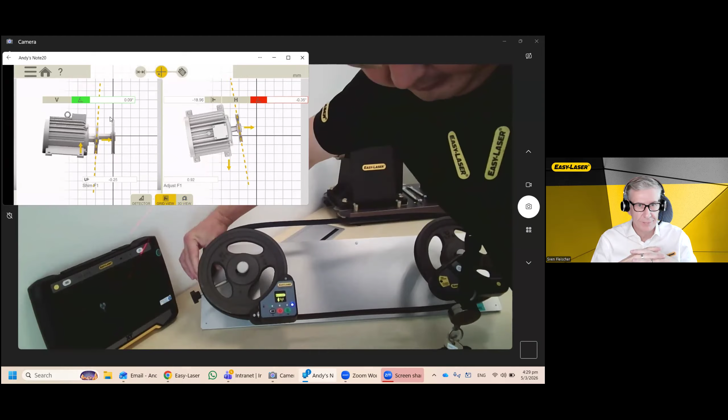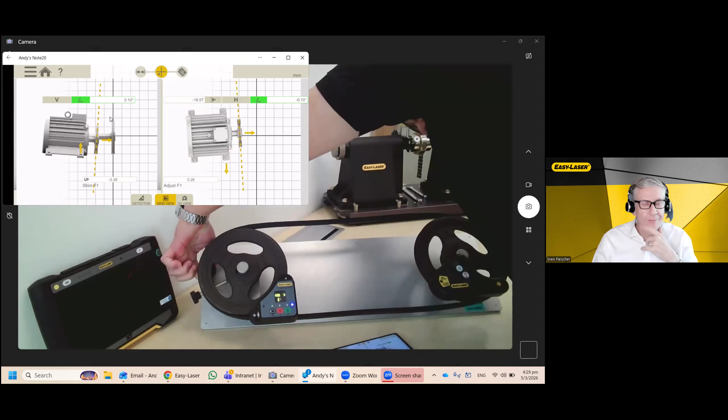Just a bit more. Okay, so just to perform this adjustment from misalignment to alignment. The same thing after that.

You can have a report. What kind of layout do you need? The default one or the basic one? The basic one only has numbers. You don't have any illustration, any photos or pictures, right?

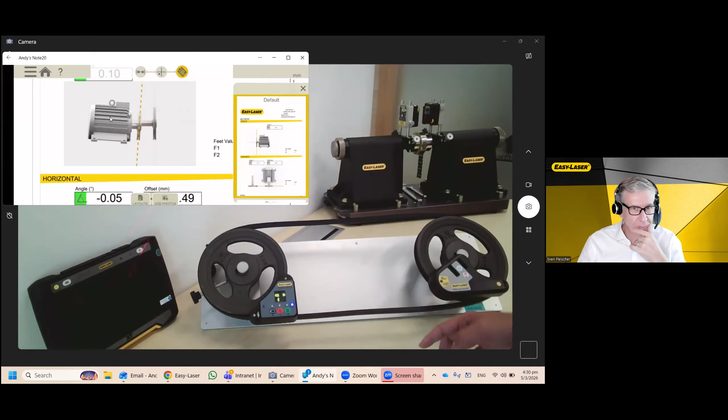So you also can do a finalization, finalize, save as PDF or Excel, then you can share. All right.

So after this demonstration, I really hope you guys can download or even install the XT app to try. Okay Sven, that's all from my side.

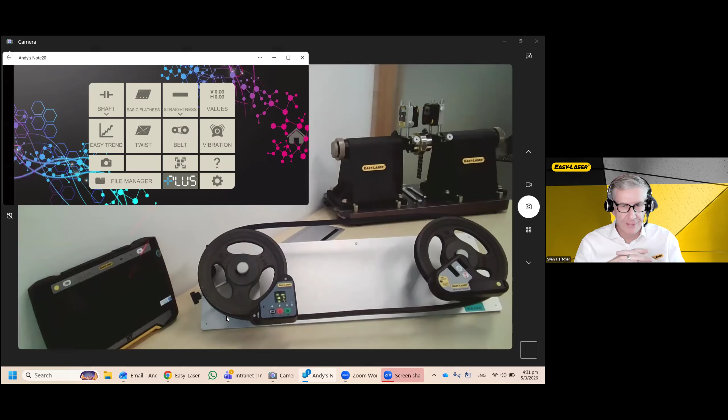Andy? Yeah? Could you do us a favor and open the browser quickly on the shared screen? Yeah, our browser? Okay, yeah, the our computer browser.

So I mentioned the plus, that this is a cloud communication, and I believe, Andy, your phone that you have used for that measurement is already paired with your individual space. So we offer basically end customers to register on that, so you get your own space where you can then have all of your data from the apps synchronizing their data towards.

So that basically could eliminate the need to send reports, because all of the data that exists inside the device or app in regards of alignment will be synchronized to that cloud space. It's a Microsoft Azure space that we basically provide to the end customer. And this allows you to handle other person's access to this information purely by browser access.

And you can configure also where this data, the measurement, belongs to, create a machine. So if you are then later measuring the machine again, you can use the last reading as a template, so that you do not have the need for new inputs of dimension and things like that. So you can actually handle them like templates and apply them to the same or similar machines.

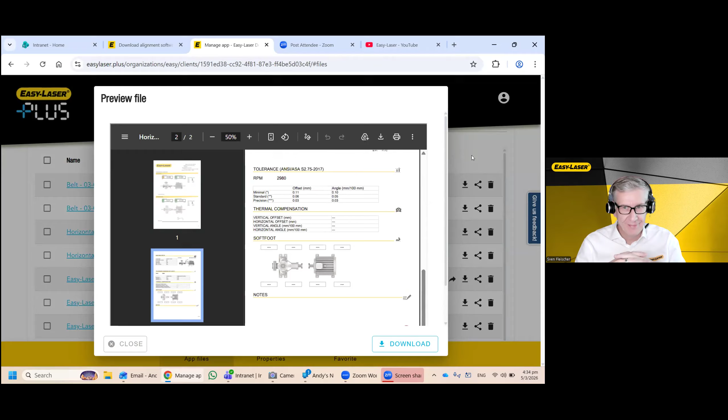Thank you, thank you very much. You're welcome, sir. Thank you so much for your attention.